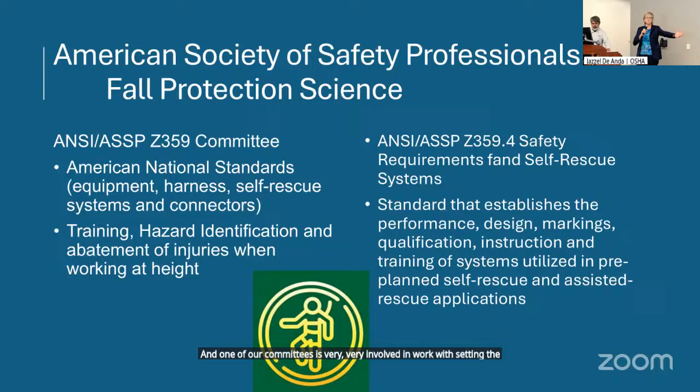So ASSP nationally gets involved in a lot of the science of fall protection. I myself am a CSP. I also have a master's degree in industrial hygiene, a master's of science. So this side of things, committees and all that, I find myself in them a lot. So we have been very involved in some of the standards for buckles, anchors, fall protection, mesh, things like that. I can't think of the right words right now. And one of our committees is very, very involved in work with setting the standards and setting them to industry and regulators.

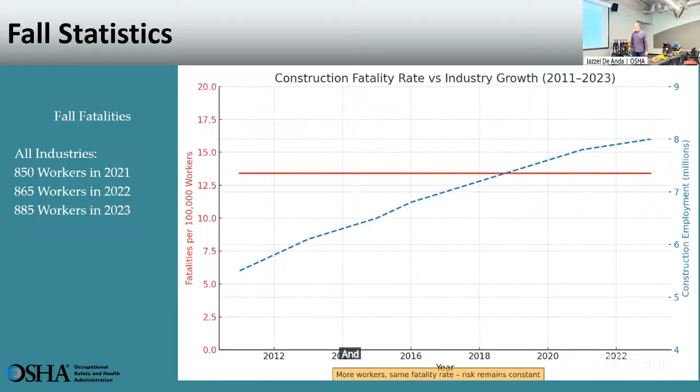And again, we have training, we have policy, we have enforcement, and we're still seeing fatalities. Now, why is this? Well, I think there's a lot of different reasons why. But I think where our safety industry tends to lose a little bit of focus is we go, okay, we have this equipment, we have this gear, and here's how you use it, and you put it on like this, and you attach this anchor over here, and you got to rescue somebody like that, and that's all good stuff. That gives people the knowledge, but we're missing stuff here. We're missing a huge aspect of this in this industry, and that, frankly, is worker perception.

Now, there's this idea, and this was a study done by Texas A&M University back in 2021, of risk habituation. And the idea of risk habituation is that familiarity of what we're doing breeds complacency. And it's simple. It's not unlike a lot of things that we do in our day-to-day life.

If nothing bad's happened and we did something that was risky, we're going to do it again. We get these mental rewards. It's natural in just being a human. We take shortcuts, we look for the easy way outs. So ingrained in who we are, we're going to take risk. And if there's no consequence for that risk, we're going to do it again.

You see it constantly. Think about it. We see 40,000-ish people killed in the United States in a vehicle accident. Huge numbers of people dying in vehicle accidents. But yet you can go out to this 91 freeway right here, and everyone and their mother's doing 85 miles an hour, if you can. If it's 2:30 in the afternoon, you'll be doing, like not even close to that. You'd be lucky to break 5 miles an hour.

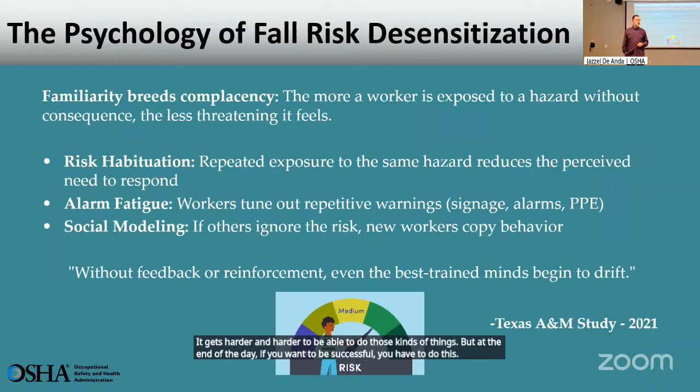Now, what are some things that we can deal with in order to avoid this complacency related to falls? Well, this study also talked about some of that. And probably one of the more neat technologies that's starting to emerge in this space is VR technology, in which this study took individual workers, put them in a simulated environment with VR, and had them experience a simulated accident.

And if you haven't had a VR headset on in your life, I'm sure you've seen the YouTube videos of people running into walls and jumping off of the floor and landing face first on the ground because it felt real to that individual. And so to replicate an accident in a virtual space is going to be real to that brain in that moment. And I think that's a really cool technology, an approach that we can certainly leverage in this industry to help those people who maybe are not quite as agreeable to start experiencing those effects of an injury and then start to change behavior.

That's one way. There's a multitude of other different ways to deal with this. Perhaps we start considering breaking up our training groups based off of the people that we know and we deal with. You know you have a high-risk group of individuals that, like I keep saying, are less agreeable. Well, how about we tailor specialized training to those folks that might look a little bit different than the ones that buy into the safety process a little bit easier.

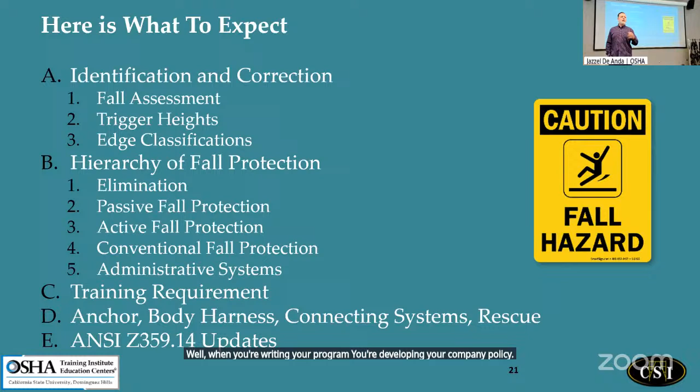We'll discuss a little bit on hierarchy of fall protection, because at the end of the day there is a document referred to as the Z359.2. That's called Minimum Requirements for a Managed Comprehensive Fall Protection Program. That is the de facto standard associated with our program policies that an employer shall maintain. We know OSHA requires a fall protection program. Well, when you're writing your program, developing your company policy, it needs to be based in some sort of standard, and that standard is the Z359.2.

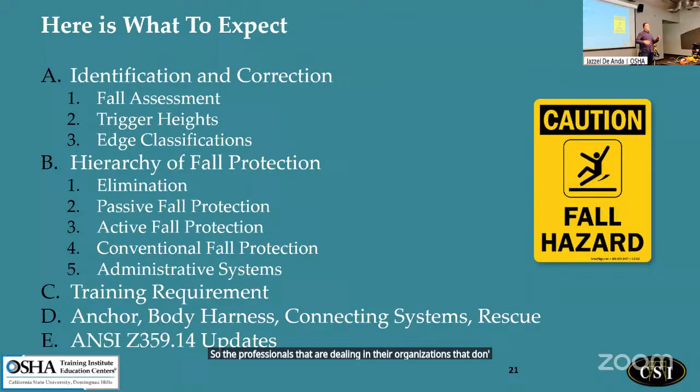By the way, those are some of the things we talk about in our trainer course for fall protection. We provide sample programs to students. We go through those program elements that are in there, so the professionals dealing in their organizations that don't have these policies have that format and structure to be able to build out those policies.

And that .2 standard does touch on these different characters of our hierarchy, in that when we're making that fall assessment, we have to go through these 1 through 5s that you see on your slide there, starting with number 1 and determining why number 1 may or may not work. And if it doesn't, we go to number 2. If we can get number 2 to work, great, we stop there. But if we don't, we go to number 3, all the way down till we're down into our administrative systems. We'll touch on some of that.

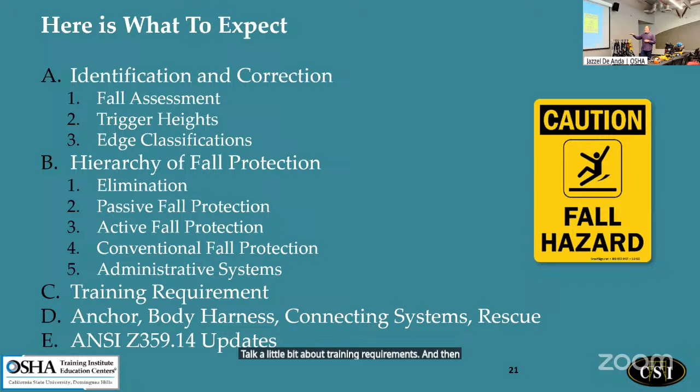Talk a little bit about training requirements, and then some overview on the ABCs, like I was mentioning, specific to the ANSI Z359.

Fall assessments—there's a lot of different ways to deal with this. Now, when you make your fall assessment, it's crucially important that we don't just assess it once and assume these exposures remain static, particularly in construction environments. In some of our other more static environments, such as a refinery or a water treatment facility, depending upon the nature of the work, our fall exposures might remain relatively static, and the control methods for how we deal with those become a little more easy to deal with at times.

But especially in the case of construction, shipbuilding, our maritime industries, we have rapidly changing environments where there might be a structural anchor available to attach to one day, and then the next day that anchor's gone because it's closed up with the wall system or it's inaccessible. Or the phasing of work requires that those passive guardrails installed for purposes of fall protection on a building somewhere now need to be removed during a glazing process or a wall installation to close that building off.

So what does that look like? When we're making our assessments, we have to assess that work from the beginning throughout the entire duration all the way to the end. And that duration might be hours, days, months, even years.

If we don't think about how that process works, we're just going to throw out a piece of equipment and say here's your 6-foot lanyard, go tie off. And a good worker that's agreeable will do just that—they'll tie off with the equipment provided. May not be a good thing though, because while that equipment might have worked for one environment, it may not work for the next phase of the work. But a good worker says the boss told me to tie off, so I'm going to tie off. Sometimes we see the inadequacies of where workers decide to attach those connecting systems, because they just want to do the right thing, but maybe aren't aware or aren't provided with the right equipment to do that.

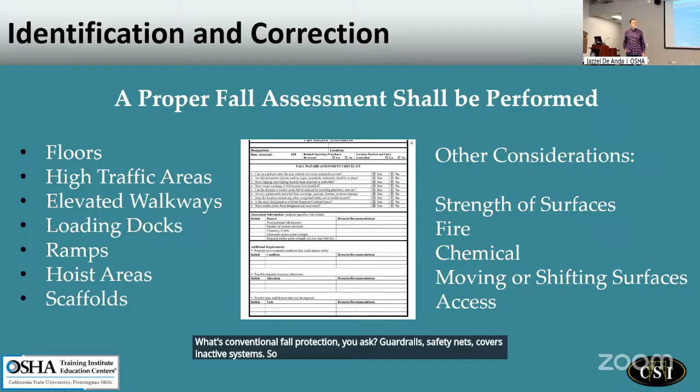What's conventional fall protection, you ask? Guardrails, safety nets, covers, and active systems—so fall restraint, fall arrest. That's your conventional systems. Your administrative systems, this whole idea about staying 6 feet back or putting in a barricade zone, that doesn't apply depending upon the frequency of that work in a general industry environment according to Cal OSHA.

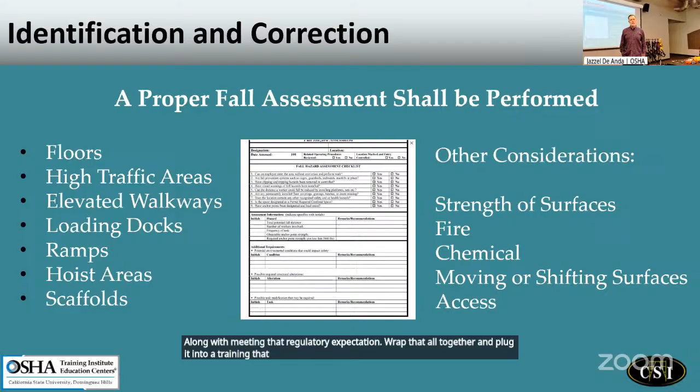Crucially important, our fall assessment evaluates the practical side of what we're dealing with, along with meeting that regulatory expectation. Wrap that all together and plug it into a training that touches on the psychological aspect of the worker, and now you're headed on the right path. Not easy, but it can be done.

Human beings fall at ground level. I mean, how many people die in a year just in the morning getting out of their shower? You hit that head and you hit it right, it's not going to be a good thing. So our fall assessment should take us a little bit beyond our regulatory responsibilities and start to touch on the actual risk presented to the human doing that work. Just because we're compliant doesn't mean we're safe. Fair enough? I think that's a fair statement. Just because we're compliant doesn't mean we're safe.

At Commercial Scaffold, CSI, our procedures are to guardrail everything. Everything gets a standard guardrail. It could be a 20-inch high scaffold platform—that's getting a guardrail.

Now think about why. A scaffold system is a temporary system, elevated platforms to get workers access to a wall system for whatever purpose. Where is their focus for a worker doing this? Is their focus on that scaffold deck as they're moving around? No, they're looking at the work surface. They're walking along, focused on painting, focused on scratch, lath, and brown, focused on caulking windows. But at the end of the day, they're not necessarily always aware of that fall exposure. And a step back means a fall off a scaffold, even 20 inches high, can kill people. It certainly can injure them severely.

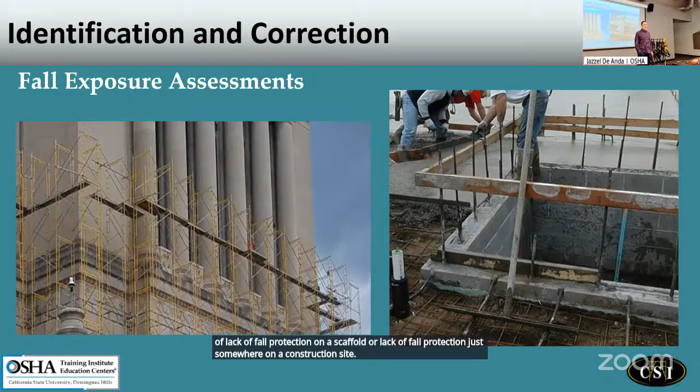That's a cue to us. We've got to be doing something different. Scaffolds get tricky to deal with. You've got a temporary system built at a fast pace where unique shapes create holes and gaps in areas that get difficult to deal with. It's common that scaffolds lack fall protection.

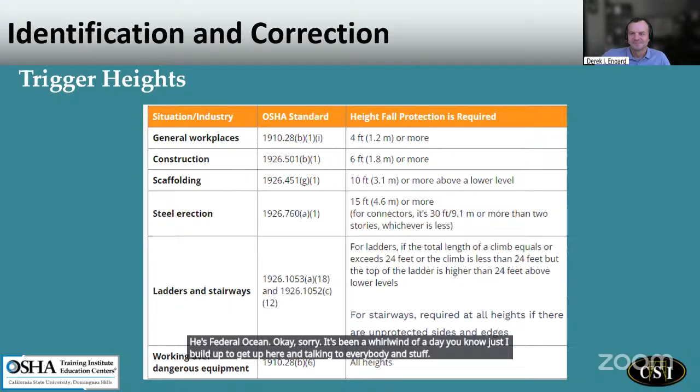Jazzel, are you familiar with some of the rules? I know that there's a plan to adjust this down from 7.5 feet down to 6 feet, which, by the way, for just general fall protection rules in construction has been a conversation as part of this rulemaking process for Cal OSHA for years. But I think finally now we're actually going to see it change. Is that the case?

No, our program has to be as effective as federal OSHA, right? So that's in the works, and normally the standards board are the ones working on promulgating that standard. We just have to adopt it. It's in the works, and if you have any comments, you can call the standards board to voice your opinion about it. Some of the industry in California are against the 6-foot fall, but it's in the works, yeah.

Yeah, and that's the case, and I've seen this for decades, where these conversations with Cal OSHA have been had: hey, we need to drop this down to 6 feet. And it looks like it's going to happen.

Industry gets involved, comments start happening, and Cal OSHA rolls back on it, ends up keeping 7.5 feet. Cal OSHA seemed distracted for a few years through COVID, so they didn't seem to have too much interest in adjusting fall trigger heights. Jazzel, are you seeing any changes coming down the horizon with roofer fall protection for Cal OSHA? Do you think that 20-foot rule for roofers will also be adjusted down to 6 feet, or hearing any rumblings about that? The standards board is working on that right now.

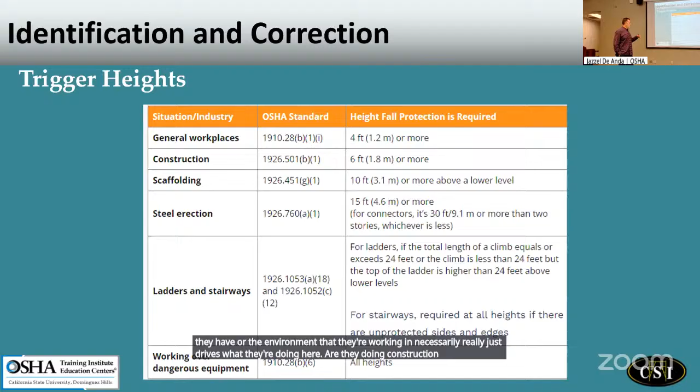Here's our trigger heights for construction environments. And naturally, in general industry as well, our trigger heights do vary depending upon the work that's being done. Notice it doesn't say anything about the company name or the type of insurance that they have or the environment that they're working in necessarily. It really just drives what they're doing here. Are they doing construction? Are they doing general industry related work? Are they working off a stairway or a ladder? That's going to drive these trigger heights. There's a lot of nuance here, and we talk about this in these fall protection courses.

Now, what is an unprotected edge and what is a leading edge? And this is a common sticking point for me, in that the vernacular used in the industry is not always entirely correct. And I try not to be too nitpicky, but at the end of the day, how we classify our edges is what drives the type of fall protection system that we're going to use.

Now, leading edges are a little bit different than unprotected edges. We can see that I've identified our unprotected edges as a static edge, because that's really what it is. It's an edge that's not moving. It's just an edge that's there. It doesn't matter where it's at. It could be a roof. It could be an elevator shaft, a utility shaft, but it's a non-moving static edge. Again, without a guardrail, greater than 6 feet to a lower level. Unprotected edges shall be protected by means of conventional systems.

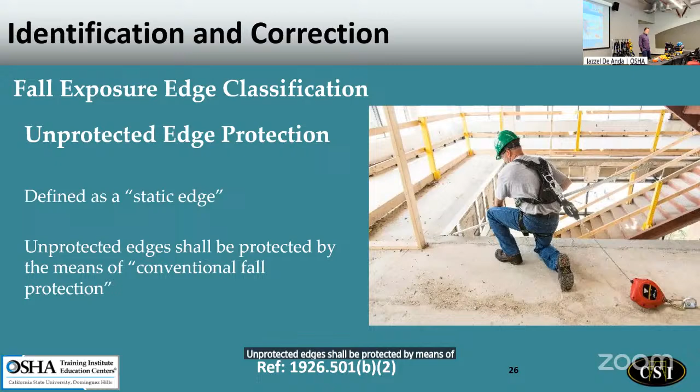Unlike our leading edges, let's think of leading edges as a moving edge. As a result of construction or dismantling of things, we've created open holes or gaps or voids to a fall to a lower level. That's what a leading edge is. It's an edge that is being constructed and that edge is moving.

So scaffold builders that are erecting a scaffold system, and we're adding levels above us and adding planks and things like that. Well, every time we've added a platform that's unguarded, I've just created a leading edge. And then I add another platform and another leading edge. As soon as that work stops and we're no longer actively engaged with that assembly or disassembly process, that now becomes classified as an unprotected edge.

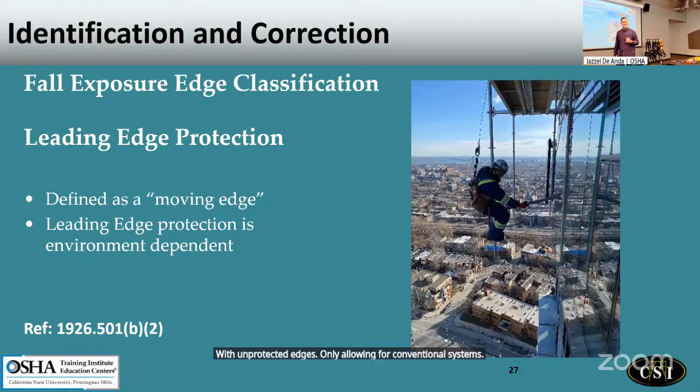Now, I'll say one more time, the reason these categories are important to understand is because the type of safety protocol we're going to institute does depend on this edge classification. Again, with leading edge, allowing for administrative systems or conventional systems, with unprotected edges, only allowing for conventional systems. Not too hard to understand, but there's a lot of nuance there, of course.

Ramps and walkways, those have different trigger height requirements depending upon where they're being used and where they're at. They present their own unique hazardous environment, slips, trips. Another leading cause of injury in the United States is a slip or trip. It doesn't necessarily have to be a fall from above ground. It can be a slip at that walking surface.

So anytime our platforms exceed a slope of 2 in 10, we need to install skid resistant coatings, chicken ladders like we can see right here, chicken boards across it, anything to create some traction between the footwear of the user and that ramp surface directly. That's our magic number, a slope of 2 in 10.

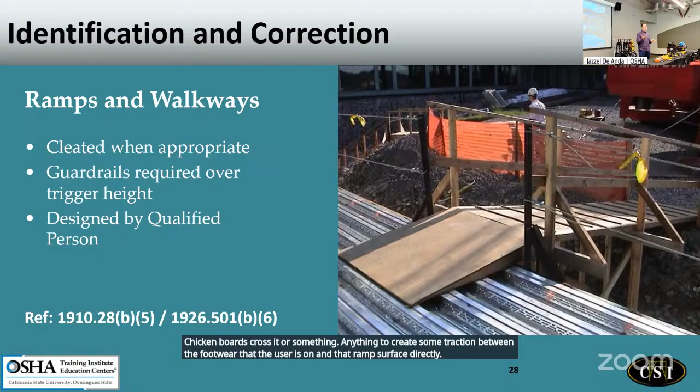Now, through our hierarchy of fall protection, I've been touching on this a little bit, but let's unpack it a little more specifically so we understand what we're looking at here. Elimination is always going to be preferred. For every work process and environment, we should be asking ourselves, do I have to put somebody at an elevated surface in the first place? If the answer is no, then let's do that instead.

Of course, that's not always feasible. After all, we've been touching on scaffolds at times. By nature of a scaffold, it's a temporary elevated work platform, so just what it is means that elimination is not a possibility in that regard. Then from elimination, we start working our way down these various systems. If we can't eliminate the fall by not putting a human in the air, then we go, well, can we have a passive system? Passive systems are things like guardrails, covers. It's a physical barrier to prevent somebody from falling over that edge.

What happens if you're not dealing with an unprotected edge and now you've got a leading edge where that edge is moving? Well, is a guardrail passive system really feasible? Of course not. Maybe it's an iron worker shaking out Robinson decking across structural steel. It's not feasible to move a temporary guardrail in that leading edge area every time they lay down a new sheet of Robinson decking.

So then the next question is, okay, well, can we do fall restraint? Fall restraint would be like a dog leash, keeping people from reaching that unprotected edge and experiencing a fall. Well, if you can't do that, just by nature of how things are moving and where your anchor point is located in relation to those fall exposures, then we're going to be down in fall arrest.

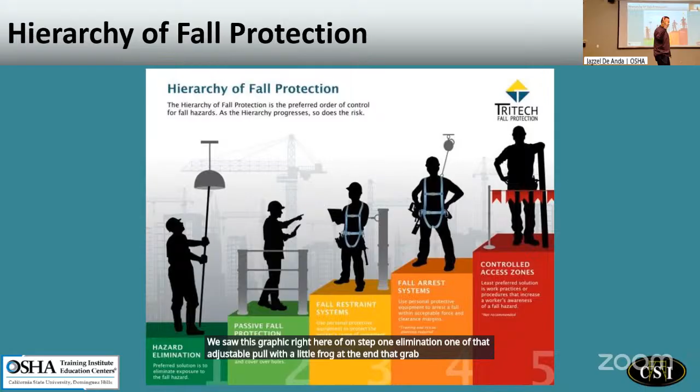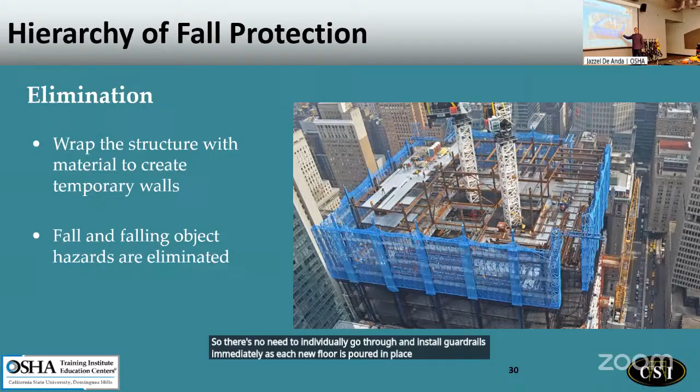That's one way. Another way is encapsulated building systems, sometimes referred to as cocoon-type systems that wrap the entire structure. These systems are put onto hydraulic jacks and moved up with the building as various floors are erected, so there's no need to individually install guardrails immediately as each new floor is poured in place or erected with structural steel or whatever the building's made out of.

Now, maybe we can't have a cocoon system and eliminate that fall exposure, but we can minimize the duration of time that workers are exposed. So as we go through that hierarchy of controls, maybe we find ourselves down into administrative systems. As a result of our fall assessment, we should be asking ourselves throughout all phases of work: can I move up into a higher form of control?

Hey, we're down here dealing with warning line systems - can I move up into fall arrest? Will this phase of work allow us to move into fall arrest? Or even better yet, would this phase of work allow us to move up into elimination systems? Changing our sequence of work sometimes can allow us to move up into higher forms of controls.

And frankly, that's what we see in a couple of these photographs. Otherwise these prefabricated roofs would typically be installed by framers walking top plates, assembling the trusses, laying them out, putting on roof sheathing, and all those other things. Now that system gets flown up as a unit. Eventually workers are going to have to engage fall arrest, but for the duration of time these things were assembled, it was done at ground level, eliminating that fall exposure and the duration in which they would otherwise have been exposed. We do this all the time in the scaffold industry.

When we do a 3085 scaffold class, we're probably going to spend about 3 or 4 hours discussing the nuances of how to incorporate fall systems with scaffold assembly or disassembly. Suffice to say, it's not something we have time to go into in great detail here, but know that in the scaffold industry, the way things get assembled, we're minimizing our fall exposures, minimizing the duration of time we're in those lower levels of fall controls. We're sequencing our work so we're as high up that level of fall control as possible throughout that phasing of work.

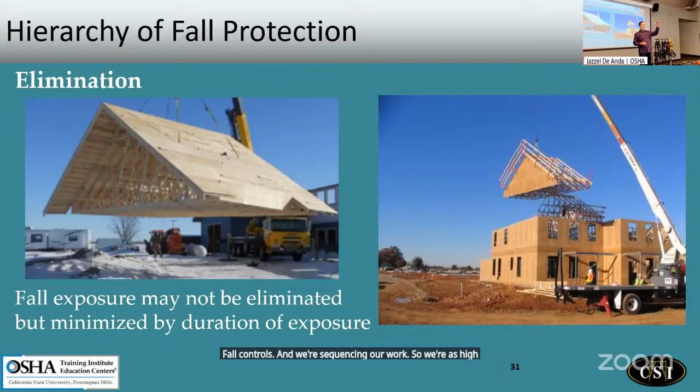Now, if guardrails won't work, maybe we need to look at covers. Covers have to be installed over any open hole, labeled, designed by a qualified person, and meet a 2-to-1 safety factor for that environment. That safety factor depends on the type of equipment or environment we're dealing with. What we build that cover out of depends on its use expectations. You might have forklifts driving across that cover, board carts, semi-trucks—that looks a lot different than if it was just humans walking across it. That's why qualified person design for a cover is necessary to evaluate these kinds of things.

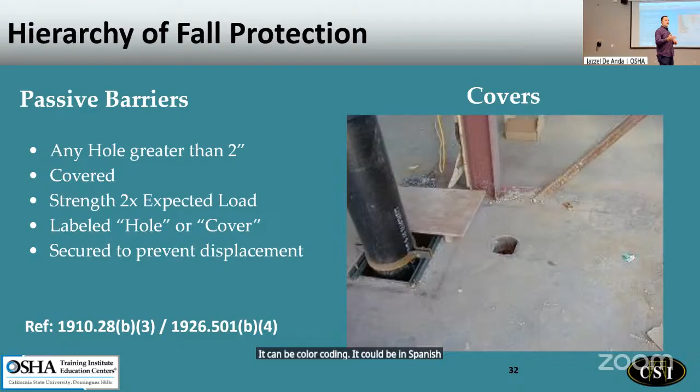Labeled as hole or cover—Cal OSHA requires that hole or cover communication is done in a way that the worker understands. It can be color coding, it could be in Spanish or whatever language. It doesn't matter, as long as the worker understands what the purpose of that cover is.

If we don't do covers, maybe we're into passive barriers. We have standardized heights and strengths for our guardrails. A standard guardrail is 42 inches in height, plus or minus 3 inches, so a minimum height of 39, maximum of 45, with the mid-rail approximately half the distance from the walking surface to the top edge of that top rail. It must support 200 pounds of force on the top rail, 150 on the mid-rail, and 50 pounds of force needed on the toe board, downwards or outwards.

Get those toe boards nice and tight to the deck, no large gaps in there. These toe boards are great because they're intended for falling object protection. However, they don't protect from all falling objects, particularly stuff held in the hands or stuff piled higher than the toe board that might get kicked over and knocked down to workers below.

It might not even be a worker. Just talking about this out loud makes me think about 10 years ago, there was a UPS truck driver in New York that was killed by a falling tape measure. Poor guy got out of the truck to deliver a package to a job trailer, steps out, gets hit in the head by a tape measure that fell off a high-rise building, and it kills him.

A hard hat's not going to protect you from everything.

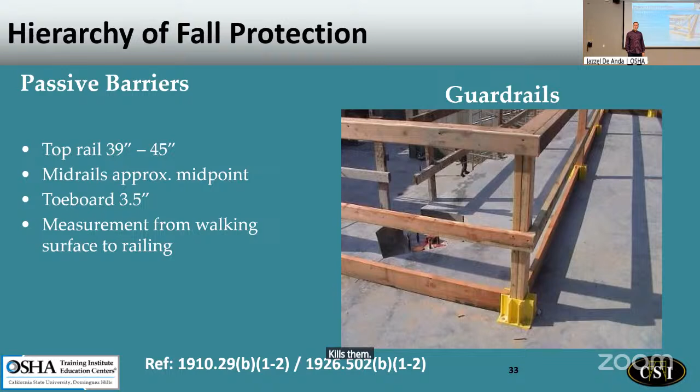There you go, there's your pound force requirements. Keep in mind these guardrail requirements do not mandate any particular safety factor by standard. All that means to us is don't lean on them, don't push on them, don't turn your back to them. You don't need to test your guardrails by pushing on them. I know that sounds like a duh statement to make, but there have been tragedies from people checking and testing their guardrails by pushing on the darn thing. Don't do that, there's no need to. A visual inspection will do 90% of the work right there. The other part is manufacturer instructions for the devices—just like we saw in that prior photograph of that little stanchion base installed according to their directives—that'll get you the capacities you need for that system.

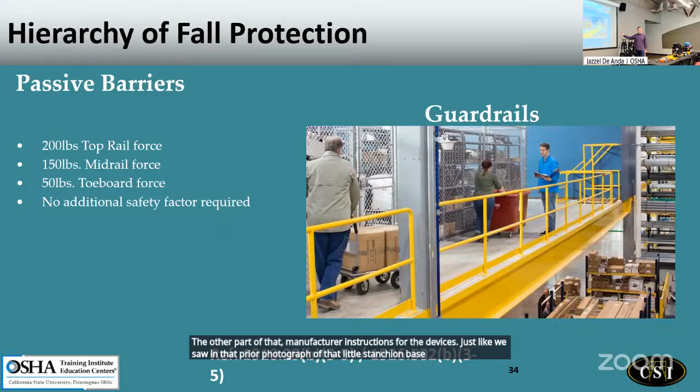Down into active systems, fall restraint. I took this photo at Disneyland. We see a couple of drummers up here attached to a pole with individual eyelets for restraint purposes, non-shock absorbing lanyards. This is a straight 2-foot style cable lanyard that's there. That's great, that is fantastic.

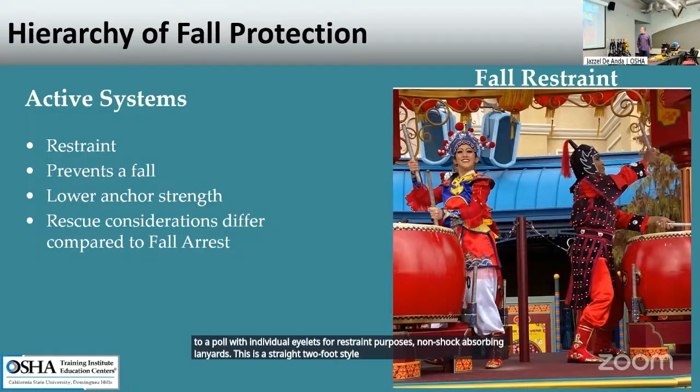We'll see these anchor strengths here real quickly. We talked about fall arrest—that's our next hierarchy of control. It doesn't stop the fall, but it should stop the impact to a lower level.

Should, as long as you're using it correctly, it should. It will, right? It will. If you're using it correctly, it will. Have confidence in the product, Stacy. Believe. She's like, yeah, it'll work.

After that would be safety nets. Safety nets as a primary form of fall control isn't something you tend to see in the industry all too often, but they're becoming more common, especially as a secondary and backup form of fall protection. The beauty of these systems is that many of them aren't just designed for fall protection of a person, but also for falling object protection.

Maybe you've been on a job site in downtown LA or somewhere similar. Dropped objects are a huge issue. You've got a building that's 400, 500, 600 feet high. Well, you drop something and it can end up a long distance away. UC Berkeley did some studies about a decade ago on dropped objects and their projection distances. The projection distance for an object striking structural steel, an I-beam, or a concrete corner can be quite remarkable—up to a 1-to-1 ratio of the drop height to projection distance. So, drop an object 200 feet under the right conditions, and it could deflect 200 feet away from the structure.

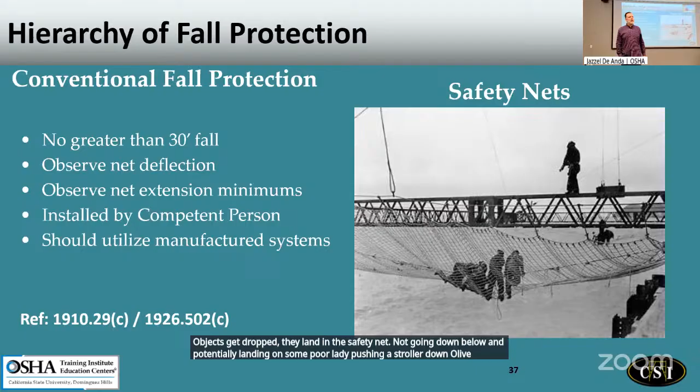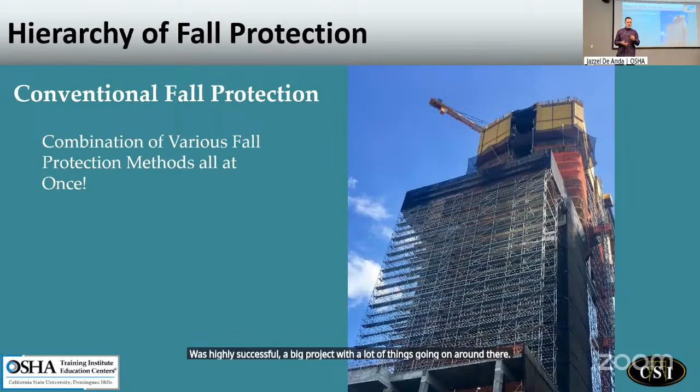Be creative in how we approach these. Let's talk about our administrative systems.

As we get into this, let me make this statement right now: if you're dealing with an unprotected edge—not a leading edge—and not roof work specifically, OSHA's opinion is there is no safe distance back. That's written into a standard interpretation from them. There is no safe distance back, but yet we hear people say just stay 6 feet back and you're good. There's no such thing.

There's no law that says you can stay 6 feet back and magically be protected. It's driven by the type of work being performed and where it's being performed. Those two factors drive the type of warning line or control line necessary. 6 feet might work, maybe it needs to be 10 feet, maybe 15 feet. It depends on the nature of that environment and what they're using on that roof or elevated surface. So it's not as simple as saying stay 6 feet back and you're good to go—no such thing.

Understand that. Now, warning line systems are intended for roofers performing roof work. Warning line systems are not a physical barrier that stops or prevents somebody from falling—they're just a visual indication of something unsafe. In other words, it's: don't go past that line, something's dangerous on the other side.

Actually, I was going to say that 6 feet is pretty good, because on most job sites I only see like 2 feet. There you go, exactly, right? If you can get 6 feet out of it, you're winning. Because darn it, we're doing roof work and we've got to get to that parapet, so if we just squeeze that distance a little—complacency—we set it at 5 feet. That's kind of good enough. We were at 6 on the last job, but nothing bad happened, so let's just set it at 5 feet.

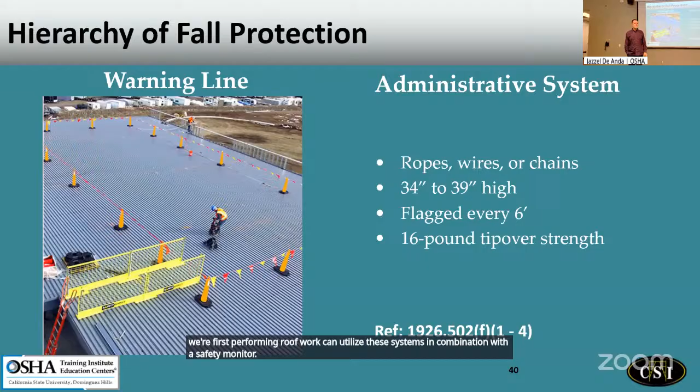We have a nice transition area from the portable extension ladder going up into this designated area, as it's referred to, and within this designated area, roofers performing roof work can utilize these systems in combination with a safety monitor. Safety monitors alone as a sole form of fall protection are generally not permitted, with certain very limited exceptions, like roof widths less than 50 feet, and stuff like that.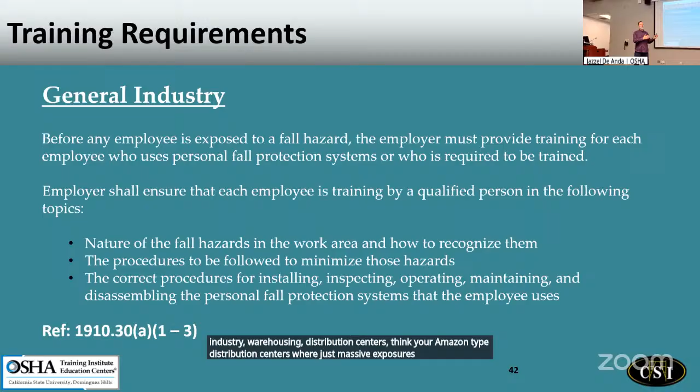Now, general industry had expanded the laws and more mirrored the construction standards back in 2018, because what was being seen is an increase in the per capita rates of falls in general industry. And this was coming from telecom—we ended up with 3G, 4G, and 5G cells, so a lot of workers were exposed to falls in that industry. Warehousing, distribution centers, think your Amazon-type distribution centers, where massive exposures that weren't so commonplace have become extraordinarily commonplace. So in 2018, federal OSHA brought over a lot of the construction laws to the general industry side just for a little bit more coverage.

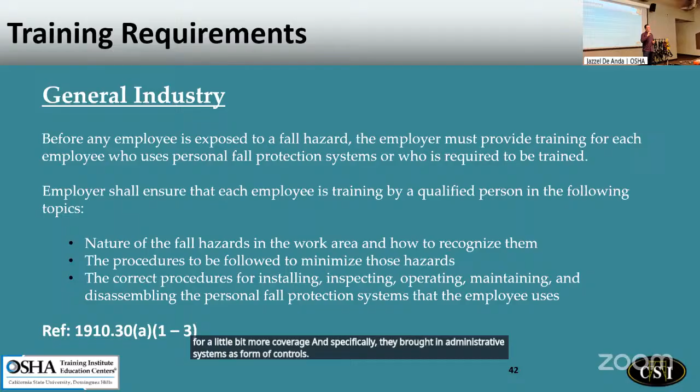And specifically, they brought in administrative systems as a form of controls. And most importantly was a training requirement, because at the time, pre-2018, there wasn't a training requirement necessary for general industry environments. And training is absolutely required, of course. And I think that should go without saying, but federal OSHA has gotten pretty specific in that not only do we provide training, but with a formalized certificate showing that that person has been trained.

Now, currently, it is permissible for workers to be trained by their employer. Personally, I think that's something that the evolution of law should probably address. If we want to start getting down to a little bit more success with our fatal falls, let's start addressing the nature of who's providing training to these people. Because in my experience, I've seen it done where an employer sits their people down, puts them in a big room, and spends 20 or 30 minutes on this stuff. And it's like, okay, well, what did those people really get from a 20-minute training? But technically speaking, if they covered those topics, that certificate is not any less valid than one in which a 4-hour training was provided. So that's my opinion, but maybe we can do a little bit better on that side of things.

Start considering bringing in some independent trainings. Bring in your 3M representatives and people like that to provide a different perspective on what the employer is typically exposed to.

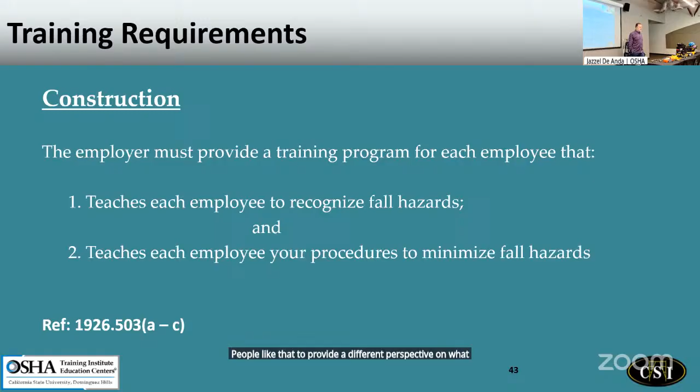Now, our anchor connectors—let's categorize for an active fall protection system our anchors and anchor connectors. They are two different things. I won't go into too much on this because I'm just going to touch on the ANSI side of things; Stacy's going to get into the actual rigging up and use of these connecting systems. But at the end of the day, our anchors classify under two different types, meaning the anchor is the structure, the building, the item that we're attaching that anchor connector to. And then within that, our anchor connectors are going to classify as a variety of different types.

With our permanent anchors, our single-use, single-person anchors are our Type A anchors. And this stuff is covered in the Z359.18-2017 standards.

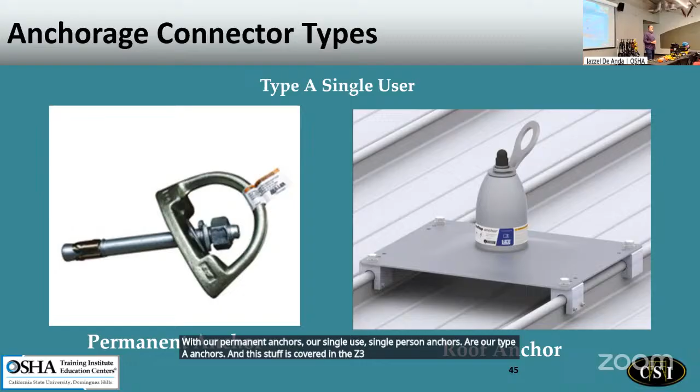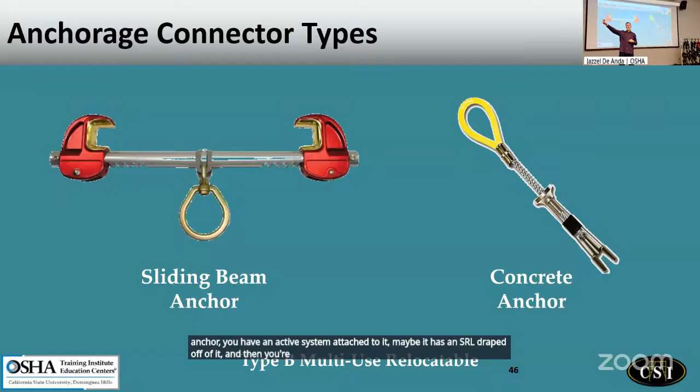Our Type B anchors are multi-use, single-person anchors. These are the ones that are intended to be relocatable and reusable—not reusable in the sense that you fall and then reuse this concrete grip anchor, but reusable in the sense that you install the anchor, have an active system attached to it, maybe an SRL draped off of it, and then you remove that anchor and install it at another location. That's your Type B anchors.

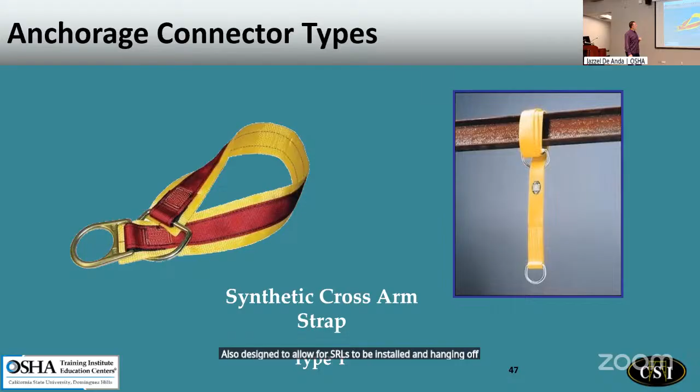And your Type Ts are your synthetic crossarm straps and other types of temporary anchors that are out there, also designed to allow for SRLs to be installed and hanging off of them, because some of these anchors, as is the case of our Type Es, do not allow for permanent or a long duration of a heavy SRL attached to that anchorage connector.

Your type Es are your specialty anchors, and generally speaking, those type Es rely on friction between that surface and the item that we're attaching to. So this is a fall protection, fall arrest system cart.

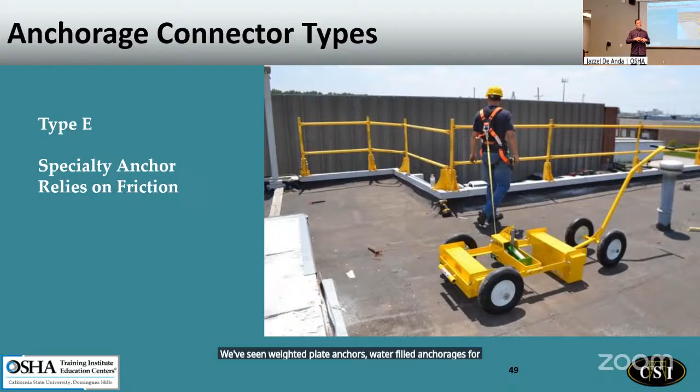AES makes a variety of these different things. I think Solid has some friction anchors too, right? Some vacuum pad anchorages and stuff like that can be utilized that literally draw a vacuum on the substrate they're attached to for purposes of fall arrest or fall restraint. I'm sure you'll touch on some of that further. We've seen weighted plate anchors, water-filled anchorages for restraint purposes. The world's your oyster when it comes to our options available nowadays.

Virtually no excuse. These anchors are not designed and intended for long-term permanent attachment of heavy SRLs to be attached to them. They are single-use, single-person, and they're of the deforming type called type D anchors. Common with your wire form anchors, the ones that just bend over and deform as part of that fall load.

So it's requiring that competent person to use their judgment, which is different than a certified anchor, which has to carry a 2-to-1 safety factor for that system. Won't get into that too much, take away Stacy's thunder here. But at the end of the day, a 2-to-1 safety factor for the entirety of that system that's being used.

It relies on the user to evaluate the type of connecting system that they're using, determining that maximum fall arrest force, applying a 2-to-1 safety factor for that system, and then that becomes your anchor connector requirement in terms of pounds that you're attaching to.

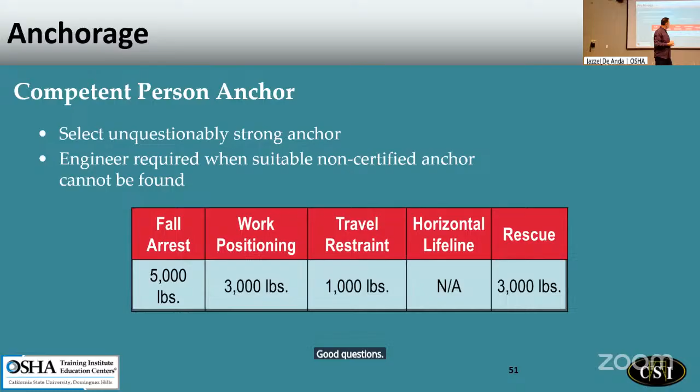All right. So we talk about tie off to scaffolds, tie off to various, oops, sorry, my buttons here. I'm getting all mixed up on my buttons, my apologies. So sorry for quick clicking around.

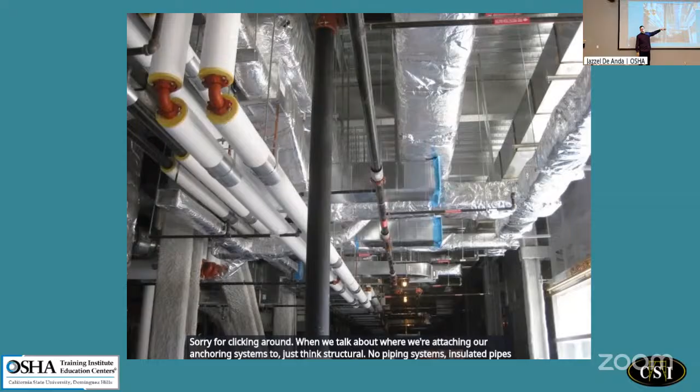When we talk about where we're attaching our anchoring systems to, just think structural. No piping systems, insulated pipes, ducts, unistrut, all thread drops, plumbing pipes, vent pipes. It needs to be to the structure itself. Essentially, think of it like this. If it's supporting a part of the building, you're probably on the right track.

And without really spending a lot of time on it, it's hard to go beyond that kind of statement. But know that in our 3115, this is something that I spend about half a day on. It's just good anchor selection.

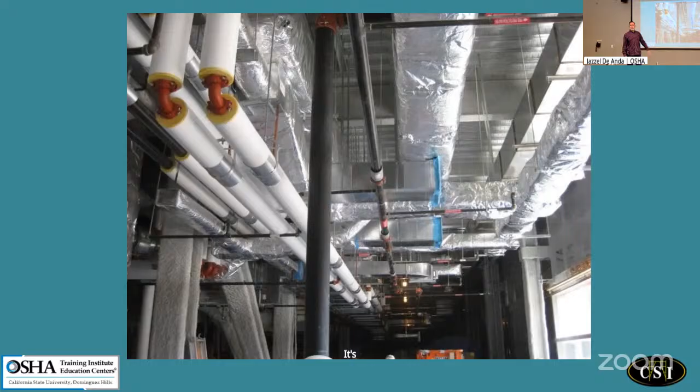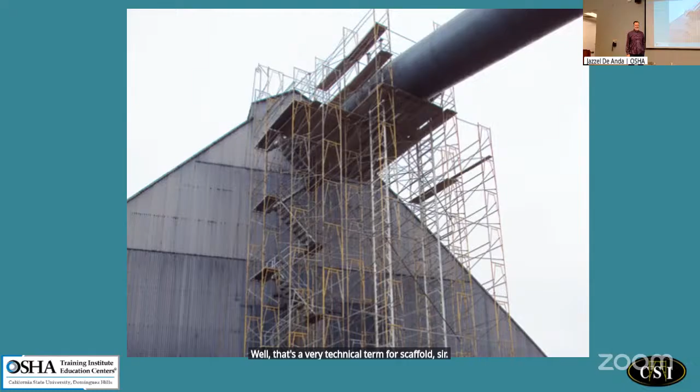With regards to scaffolds, well, that's a very technical term for scaffolds, sir. Scaffolds. Industry term. Only the cool kids know it, so I guess you're in the club now.

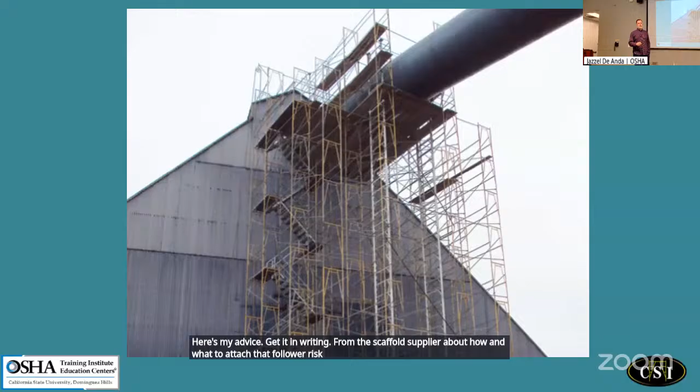Here's my advice. Get it in writing from the scaffold supplier about how and what to attach that fall arrest system to. Don't just assume all scaffolds can carry a falling person. Trust me, it relies on so many different factors.

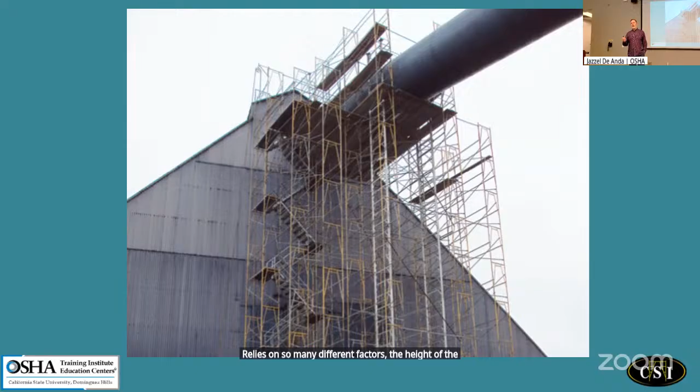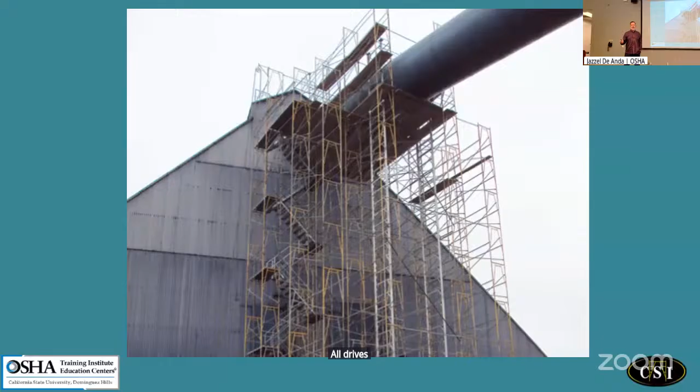The height of the equipment, the amount of planks, the crosses, the foundations, the bracing, all this stuff, the way the scaffold's tied to the structure, if the scaffold legs are secured together, all drives whether or not that scaffold's capable of supporting a falling person. My advice, get it in writing from the scaffold supplier.

Carabiners, snap hooks. So let's shift gears over into the Z359 updates that we are seeing here and some of the evolution of this. There was a period of time where non-locking snap hooks were acceptable with low gate strengths.

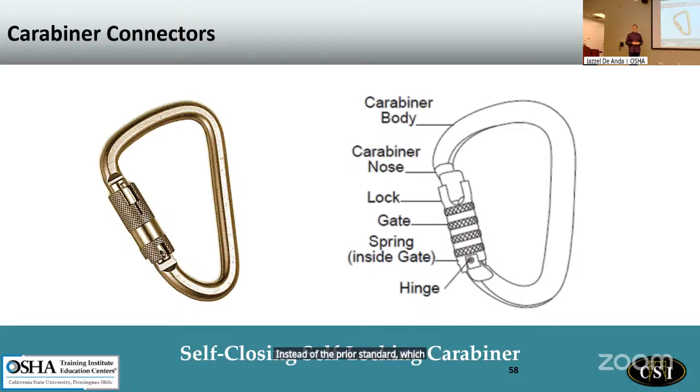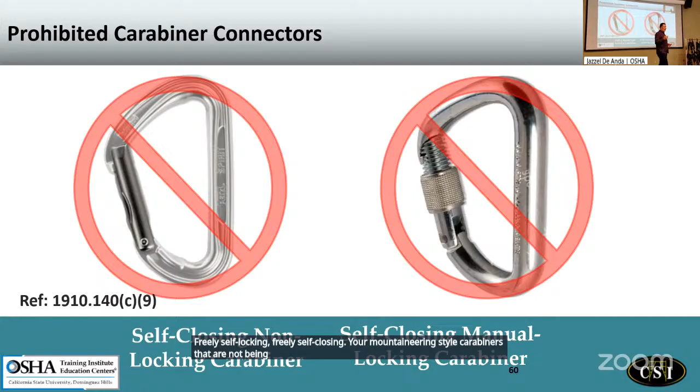That occurred in 2007, where our gates shall support 3,600 pounds instead of the prior standard, which only needed to support 220 pounds on the gate. All of our snap hooks, all of our connectors shall be self-locking and self-closing. Freely self-locking, freely self-closing. Your mountaineering style carabiners that are not being used for rescue, but are in fact being used for fall arrest or fall restraint, they cannot be of the thumb screw type. They shall again self-lock, self-close freely.

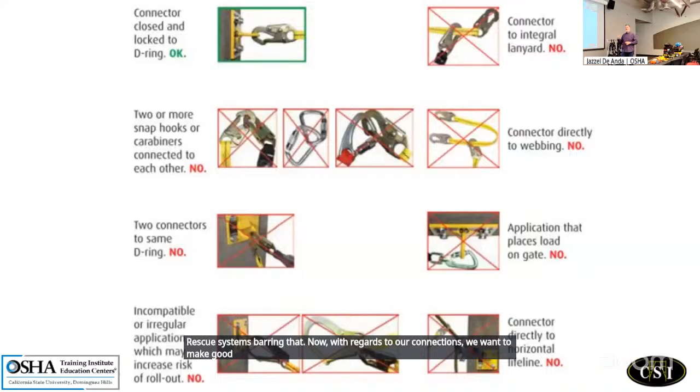Rescue systems barring that. Now, with regards to our connections, we want to make good, suitable, compatible connections, not loading on the gate, not loading across the inappropriate axis of the snap hook. I know this is going to be touched on by our 3M folks here. And we had a substantial gate strength upgrade in 2007 as a result of snap hooks failing, rolling out, and becoming disengaged. These big lobster claws, I've heard them called, large opening snap hooks, those need to be installed to your anchorage connector or directly to the anchor itself, not to your back.

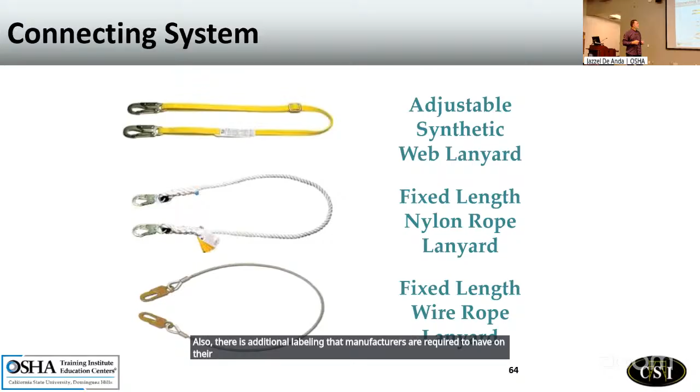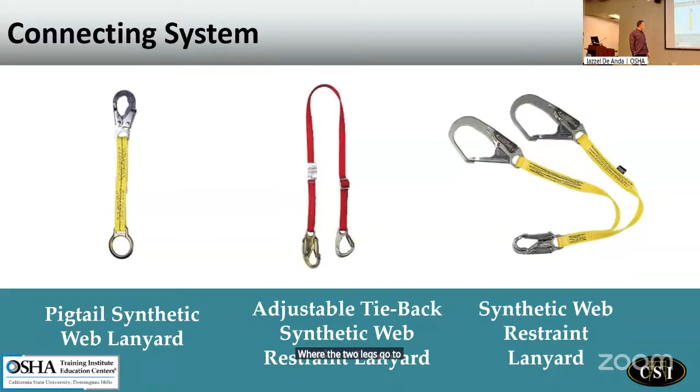Now, with regards to our lanyards, there were some updates too as of recent. Most of these updates in the Z359 standards pertaining to all these style lanyards have to do with labeling and load capacity for the user. There has been an increase from 310 pounds to a maximum body weight user of 400 pounds for these systems. Also, there is additional labeling that manufacturers are required to have on their lanyards themselves. In particular, your Y-style lanyards like this one on the right that would designate what snap hook needs to go to the user, where the two legs go to the anchorage connector. Just all things that were updated.

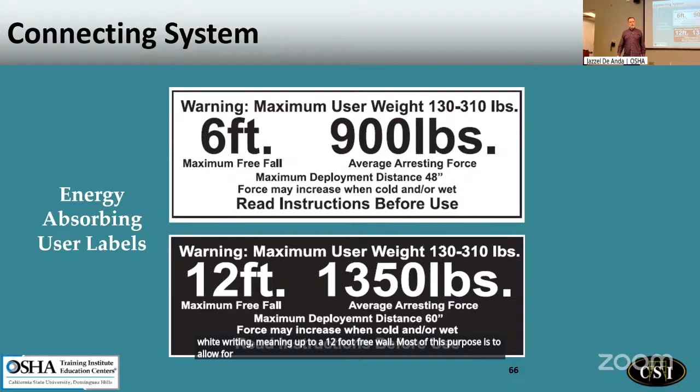Now, our lanyards have to use standardized labeling, our 6-foot free fall lanyards, that is, for your just regular synthetic web lanyards. You'll notice that this label has a white label, black writing, and then the inverse color, black label, white writing. The purpose of that is for a user to easily identify the maximum free fall limits for that lanyard, with a white label black writing meaning 6-foot free fall, and a black label white writing meaning up to a 12-foot free fall. Most of this purpose is to allow for foot level tie-off when you're using a synthetic web lanyard. That's the idea behind it.

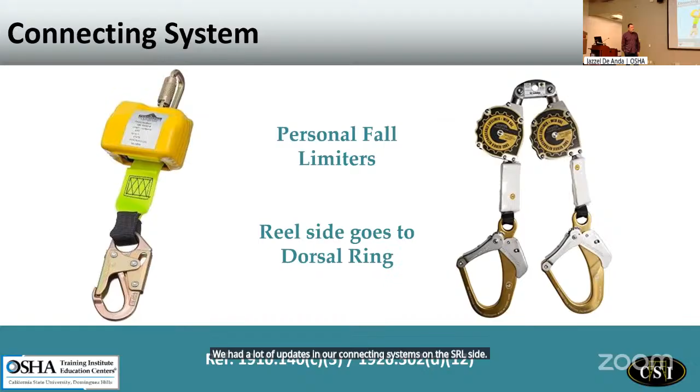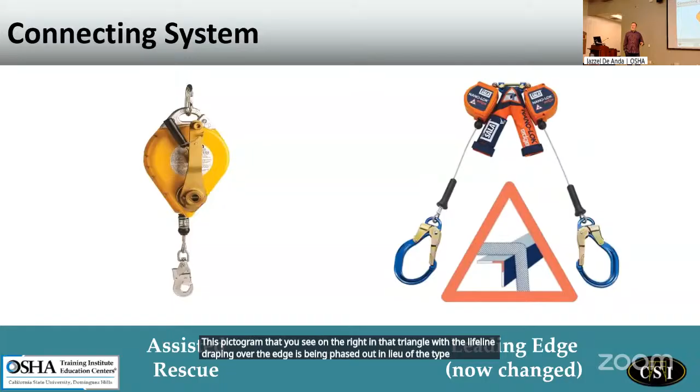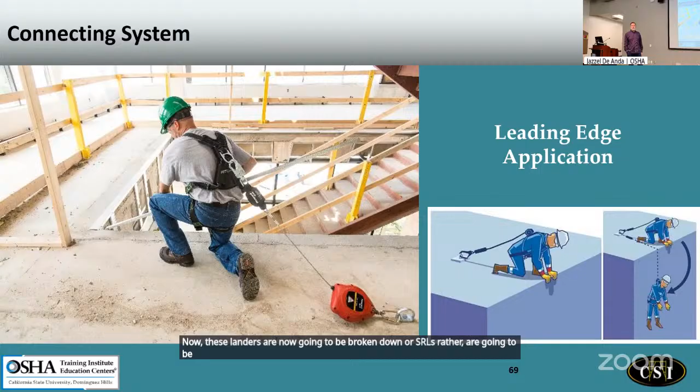We had a lot of updates in our connecting systems on the SRL side in 2021. And this is kind of cool because finally we have some standardization in the industry about how we're using these things. This pictogram that you see on the right in that triangle with the lifeline draping over the edge is being phased out in lieu of the types of SRLs, type 1 and type 2, that you're going to see coming up here. Now these SRLs are going to be broken down into either leading edge type or overhead connection type only. Those are your two major classifications.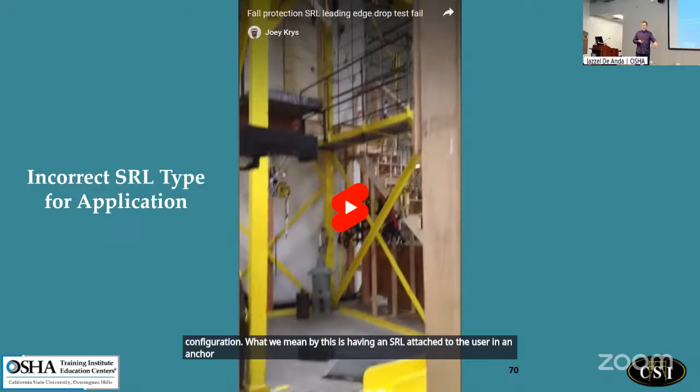Now let's look at what happens when an SRL in an incorrect application is being used. So a non-leading edge type SRL that's being used in a leading edge type configuration. What we mean by this is having an SRL attached to the user and an anchor, and that lifeline is going to drape over that unprotected or leading edge.

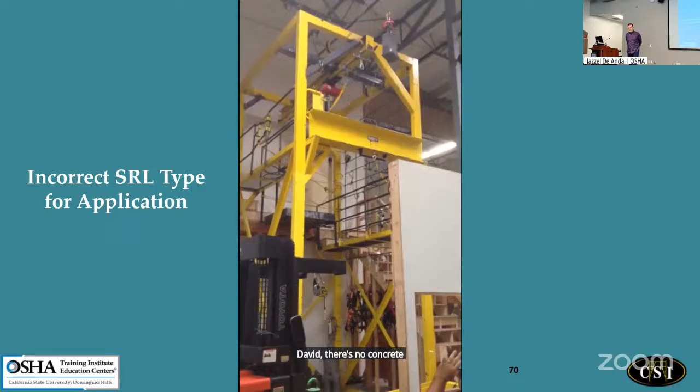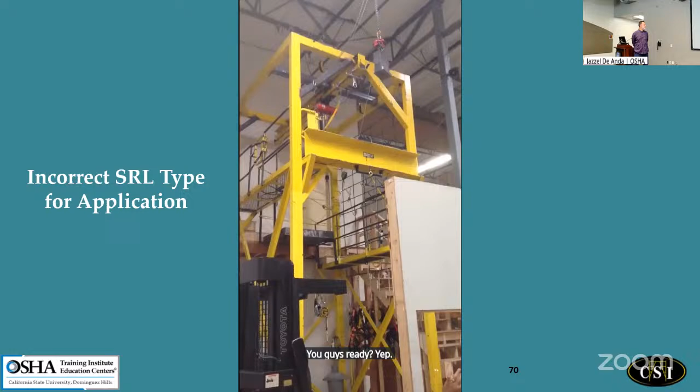Right, David, on top? David, I think there's no shock pack on this. So this is a drop test, leading edge with no shock pack. You guys ready? Yep. Okay, we're good to go. We're gonna drop. Headache.

Keep in mind, that was 3/16 wire rope cable that was severed. That wasn't synthetic web. That was freaking metal cable severed like a hot knife through butter. All as a result of not using an SRL in the correct orientation. I got stories for days of these things failing on people as a result of not using the correct lanyard configuration. What does it look like when it's correct?

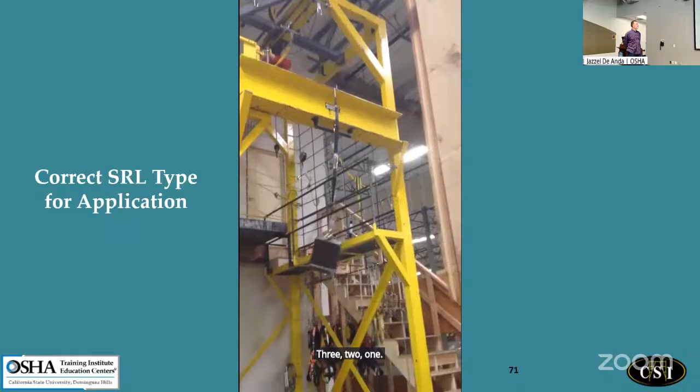This is an actual test with a shock pack. You guys ready? Yep. 3, 2, 1. Hey, that's a better result. Yeah.

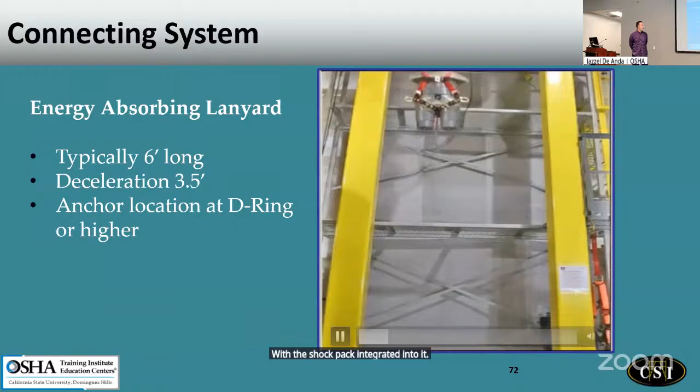Big difference there. All of it had to do with just the category of that fall arrest SRL in its configuration. The first video depicted a class 1 SRL used in a leading edge application and consequent failure. The second video you saw was a class 2 SRL being used in its appropriate configuration with the shock pack integrated into it. Energy absorbing lanyards. We can see that there's 3.5 feet of deployment in that shock absorbing system. It obviously happens very rapidly, and that purpose is to lower the fall forces for that system. Unlike a standard class 1 SRL that you're going to see in this video, that only allows for up to a 2-foot free fall before that system locks. Very rapid lock.

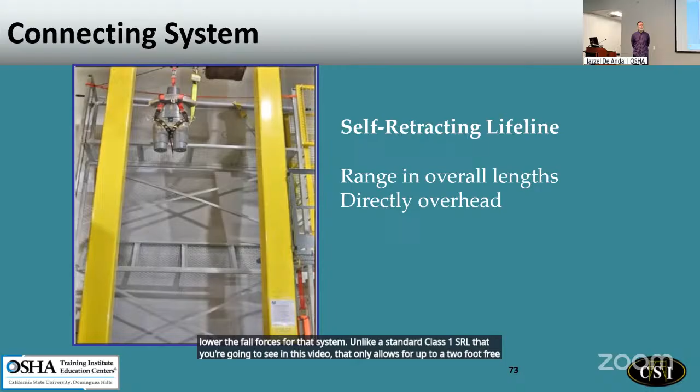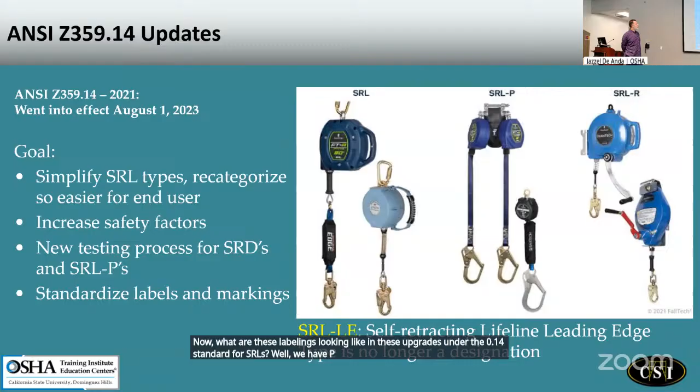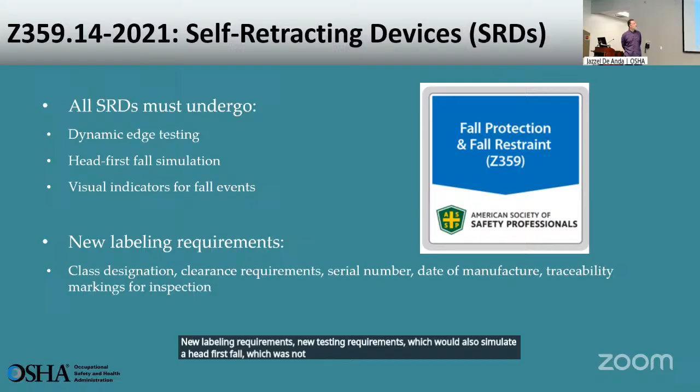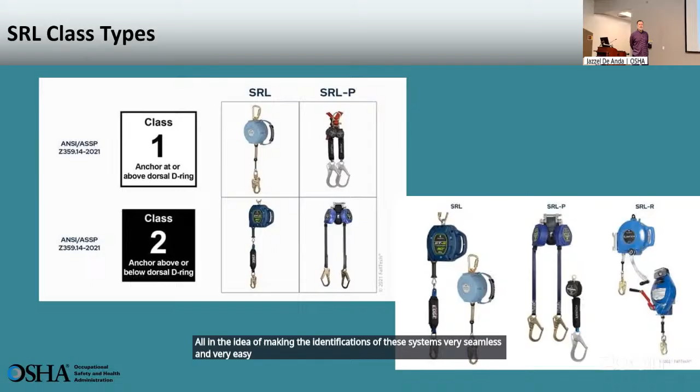Notice this class designation, class 1 and 2, white label, black writing, and then again, black label, white writing. All in the idea of making the identifications of these systems very seamless and very easy to identify how it gets to be used. And these things are mandatory to be on these labels now. No, we do not need to get rid of these things and change our old devices, but just be familiar with these labels because that's what we're dealing with. Class 2, above or below the worker's dorsal ring, with class 1 only being above the worker's dorsal ring.

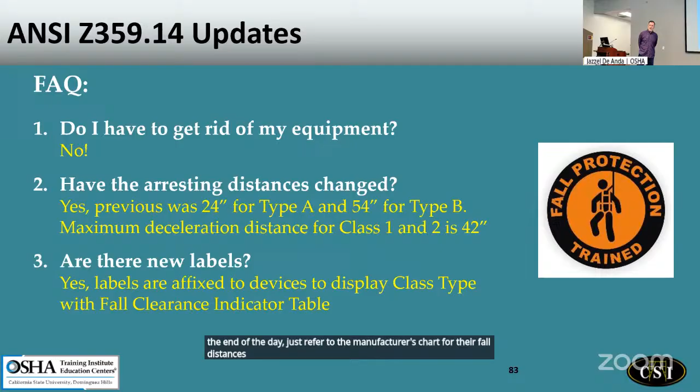Yeah, these distances have changed in terms of the total fall distance. And at the end of the day, just refer to the manufacturer's chart for their fall distances. These charts are also required to be posted on your device itself for a class 2 type of lanyard. And like I said, you can keep your old stuff. You don't need to get rid of your old stuff and bring in new stuff. But just know that this is the change that we're seeing going forward here. Along with a nice warning card that's provided with all these devices as well that looks just like that.

And a label that provides for the off-axis fall clearance and the consequent setback distance for that SRL and the unprotected edge. These are the kinds of charts that we spend a lot of time on in our 3115 classes to become familiar with how we use these systems, because they're not intuitive at the end of the day. We can't just give this stuff to people and go, all right, be safe, be careful. It's not natural to know how to rig these things up.

So without further ado, I'm done. Thank you. I do have a question online from anonymous attendee.

Is there a requirement on how far the warning line needs to be from the edge? Yes, there is a requirement for how far the warning line needs to be from the edge. It's going to be a minimum of 6 feet back from that unprotected edge, and in some cases all the way out as far as 15 feet from that unprotected edge. It depends on what's going on up there. You got to refer to these regulations to know what that setback distance is.

Any other questions? Not off the hook yet. Okay, cool. We have a person in room that's going to ask a question here.

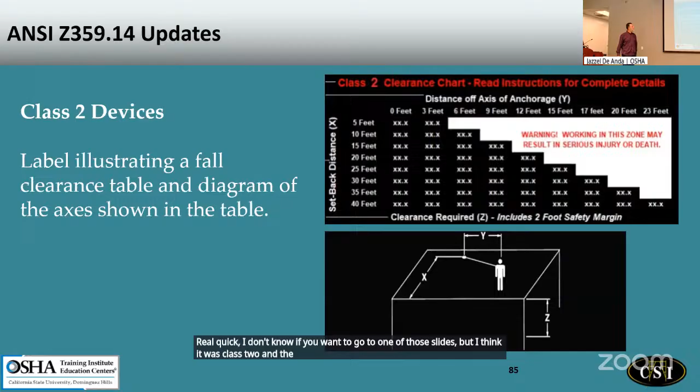Real quick, I don't know if you want to go to one of the slides, but I think it was class 2 and the class 1. You can use the class 2 equipment, I think it's that one, and have your anchor at or above your dorsal ring, and there wouldn't be any issues. But you cannot do vice versa, right? That is correct. Yeah, so you won't have them rigged up simultaneously. Your class 2s will have a wire rope lanyard for the material of the lifeline, with a shock absorber built into that to allow for that additional free fall.

What would be a recommendation for a job like roof cleaning on a flat roof? Restraint if possible. Restraint if possible, and assuming if this contractor is attending multiple work sites, that they're a service contractor going out to service these environments, and consequently, it's not an environment that they can control regularly. If it's your building, it's easy. Get some anchors installed up there, put some guardrails up there. They can be temporary, they can be permanent.

That's ideal. But if it's a contractor that's having to service multiple buildings that are not theirs, that becomes a little more challenging to control those falls. So that's where these friction, those type E specialty anchors, just Google search type E specialty anchors. There's a whole variety of these friction anchors out on the market, and they'll likely find something that'll work for them.

That's it. Cool. Thank you, Jazzel. Sure. As always, anytime I sit through your presentations, I always end up learning something. I love it. Thank you. I try. Talk too fast sometimes though.